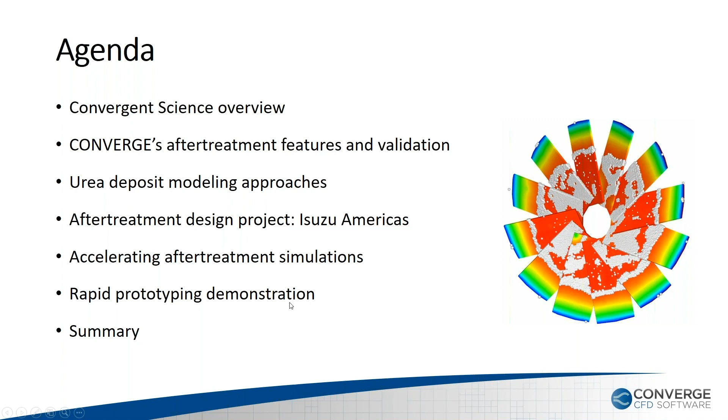Let me go ahead and describe Convergent Science for you. We started in 1997. You can see a picture of our headquarters up there in Madison, where Dan is right now. I'm down in the Texas office.

We have offices as well in Detroit, in Europe, and in India, in Pune. Since 1997, Convergent Science did a lot of consulting work and ended up developing the code that became CONVERGE. In 2008, we were able to sell that commercially. Since then, we've been extremely successful at selling that in in-cylinder combustion, and I'll have a slide on that next. I joined CONVERGE about 5 years ago to help them go into gas turbines, and then rapidly also took on helping go into after-treatment in 2014.

So it's not the first time we've been doing after-treatment, but we've certainly learned a lot and feel we've become very competitive. We also do pumps and compressors and things like that. So there's a lot of other things that CONVERGE does if you're more familiar with us from in-cylinder combustion. We have a lot of partners that we work with routinely, and we look forward to partnering with you if you don't see your logo down here.

CONVERGE primarily originally started off as good for reacting flow inside of the cylinder for combustion, but we've also moved into doing after-treatment simulations as well. As you can see here, the adoption cycle of CONVERGE for in-cylinder simulation is pretty significant. There's a substantial, very good chance that whatever car or truck you're driving, the manufacturer uses CONVERGE to design what happens inside the cylinder.

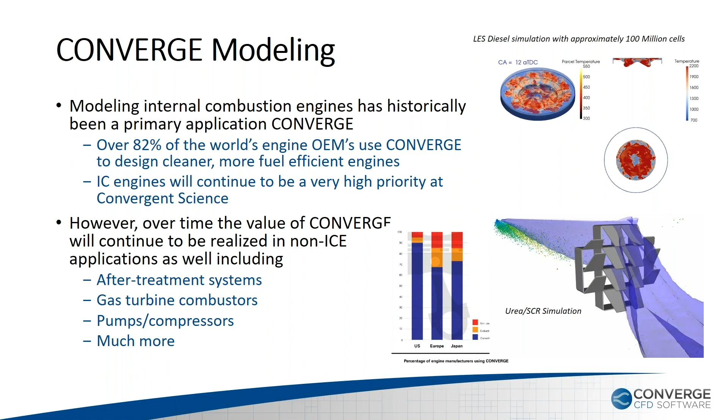Let me talk now specifically about urea deposits and some of the design challenges that after-treatment system, or ATS, designers face. Of course, they're all trying to meet emissions regulations in a cost-effective manner. Every time I talk to them, they're telling me they have less budget, less people, and less time to get done the things that they used to do in the past in their design projects. So they're looking for fast and accurate, or fast and effective, design processes that can help them meet their timelines.

The other key driver is the move towards more compact urea SCR, or after-treatment system, designs. Gone are the days of the long inline systems, and now we're looking for systems that fit underneath the hood, and they're also lower temperature to try to improve efficiency. And that poses some specific challenges when we look at urea deposit formation.

Certainly you're going to rely on effective splashing and filming of the urea-water solution, and those films can be in the temperature range that we know forms deposits, like you can see here around this injector. So urea deposits are consistently the number one thing that manufacturers tell us when we talk to them about their challenges. They don't have a solution for this. They have ways of assessing it, and I'll talk about that in just a second, but they're really very much seeking a solution in this area.

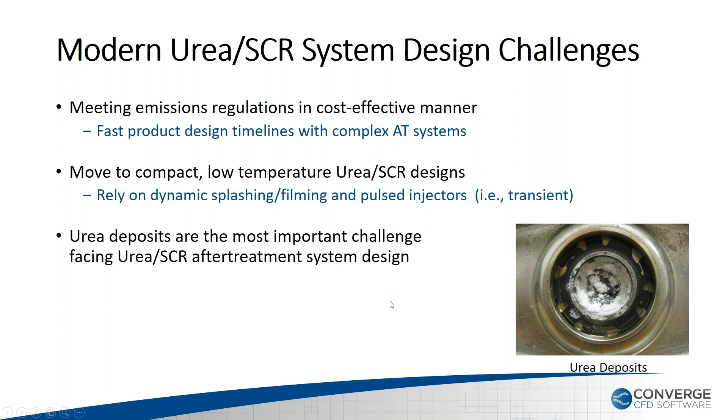Just a quick overview of CONVERGE for those of you who may not know about us. We are an autonomous meshing code, so you'll never make a mesh again.

Once you set up a CONVERGE model simulation, it's very simple to change the controls where you choose the base mesh size that you want to use. You choose whatever embedding you might want to use around a wall or near a spray. And then you select Adaptive Mesh Refinement, AMR, which is a key way to add mesh automatically when and where it's needed in areas of high gradients of, let's say, velocity, for example, with after-treatment systems. So once you've set up your case, you can change that mesh literally as fast as you can change your shoes.

One of the key factors with CONVERGE, or value propositions, is complex geometries and not ever having to make a mesh again. That all comes with advanced spray models. You can go anywhere from modeling just shooting droplets of size and size distribution with secondary breakup, to actually modeling primary and secondary breakup. We have a lot of studies on that.

When we talk about urea decomposition, we have two general approaches, and I'll describe them as simple decomposition. That's either using molten solid or multiple component approaches, where urea goes in one step, decomposes to isocyanic acid and ammonia, and then the isocyanic acid in another step decomposes to ammonia. So really it's just a single step for the initial urea decomposition.

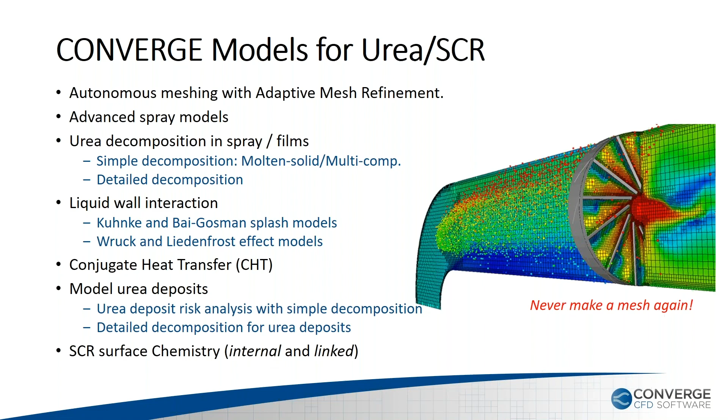Talk very quickly about spray wall interaction models, because this is a key capability that you have and you have to validate it. When the droplet hits a wall, there are different regimes it can go through, whether it's rebound, thermal breakup, deposition, or splashing. And the Kuhnke model that I'm showing here shows an effect of the wall temperature on that droplet and how it affects the actual formation of a film.

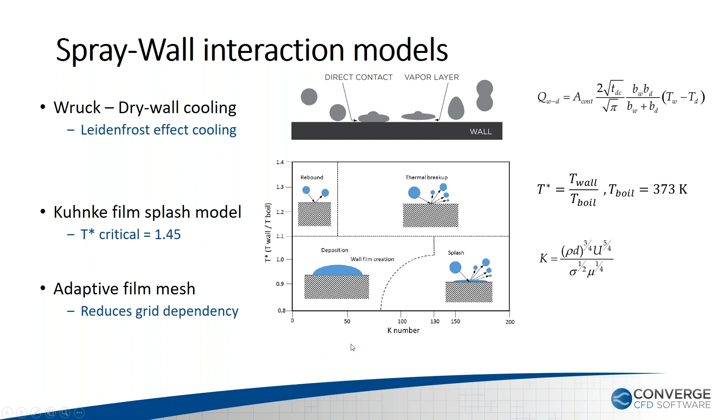And those that do this kind of work know that there is a T-star, or critical temperature, at which this transition occurs. And of course, we have that capability as well. And then, in some situations, you may find that an adaptive film mesh will help reduce grid dependency, and so we do have that capability as well.

So let's talk about validation cases. The nice thing about after-treatment systems is that they have some very well-accepted published validation cases.

We're talking about single droplets here, where we're able to predict, comparing against the data of Wang et al., the initial reduction of the droplet size from water evaporating, which is faster than the urea decomposing, and matching those data at various temperatures.

And then when you look at urea sprays, not hitting a wall yet, but just sprays and its conversion efficiency from urea to ammonia at different temperatures, we're able to predict the data of Kim, which is another very classic experiment. So we're able to predict those very well.

On spray wall interactions, there's the famous Birkhold spray wall model, and we're using that as one of the key validation models in the work that we'll present today. That's where you have hot air flowing on the top and the bottom of a plate, a 2 millimeter thick plate, that then has pulsed urea water spray on it.

You have to identify what the temperatures are in the plate as it cools before the film forms, and then as the film forms. So that's a key validation experiment.

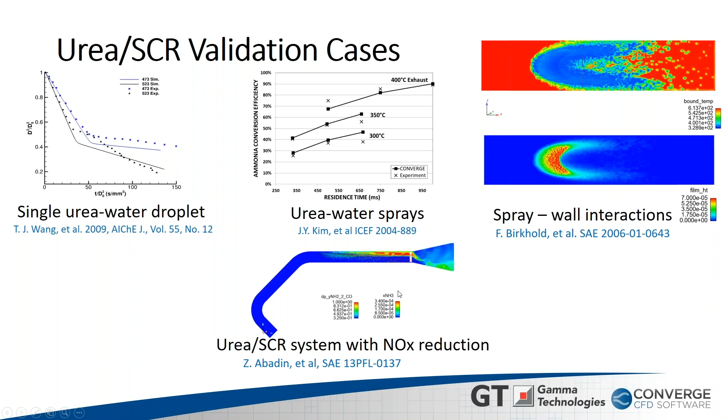This experiment talks about getting into the SCR, where we've taken some data from our friends at Southwest Research. Zainal Abidin did a study, and we were able to match the emissions reduction using GT Suite in that case, but also with our own internal surface chemistry. So this slide is intended to show you that we've done our homework on all the key validation cases for urea SCR performance. We've obtained good results on those, so we feel comfortable about our process.

If you look at the different approaches people use in after-treatment system modeling, 0D, 1D models like GT Suite and Axi Suite and the like, they just don't incorporate the 3D spray and flow, so they're sort of not effective in that area. Effective CFD certainly has the ability to aid design and troubleshooting. Hopefully you do fewer tests, but what ends up happening is the first test you do is a better quality design, and at the end of the process you have a much better quality design, or you can troubleshoot issues in the field. The key thing we all know for CFD to be valuable is it has to be predictive, and it has to be fast enough to meet the design pace. You can't come back with your simulation result in 3 weeks when the design team has already moved on.

So crystalline deposits, we know that they form in a narrow temperature range. If you use simple decomposition and identify which of these films are in the right temperature range to form deposits, and then look at some other key transport factors that might affect deposit formation, you can develop a semi-empirical relationship to predict that deposit risk. The problem is that while you've identified where it's risky, you don't know if it actually happened or not. So you really have no information on crystalline species to either inform your design or look at regeneration strategies.

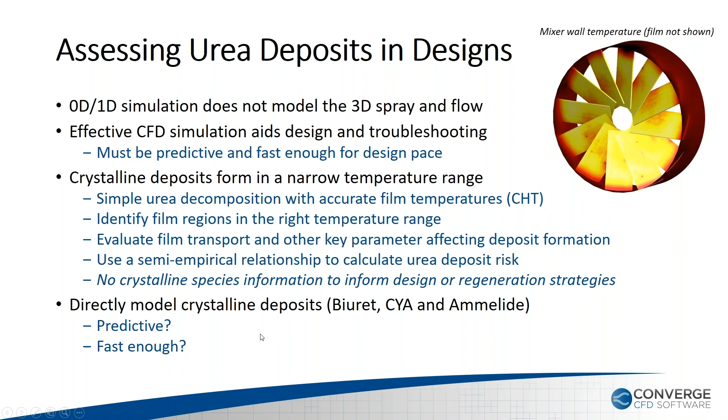So what we'll talk about here today is directly modeling those crystalline deposits, and those are biuret and also cyanuric acid and ammelide, that Dan will talk about. So the question you should ask yourself is: is it predictive, and is it fast enough?

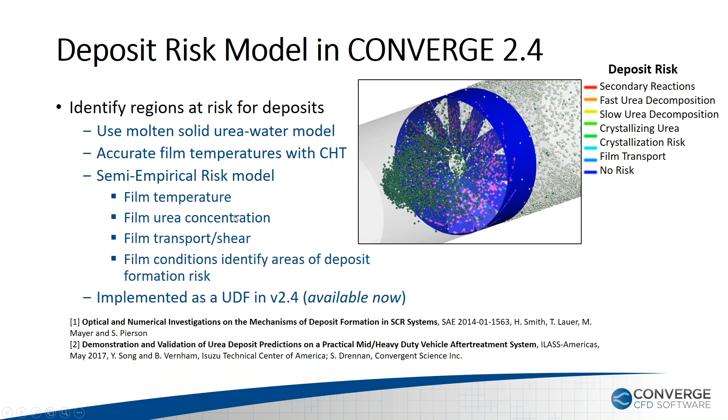Here are some results from our deposit modeling in our current version, identifying of the films on the surface which of those have certain risks. I'll talk about in the next slide this actually being applied to a commercial design case.

This is a study we did with an early adopter of our urea deposit capability. Yong Sun took the lead on writing this paper for Isuzu Americas, and we were happy to have them as an early adopter and alpha tester, and also to share the data they had and its performance with CONVERGE. It's a medium duty diesel truck, and an after-treatment system study aimed at maximizing the overall NOx reduction you can get out of this system.

So the urea is injected here, and there's a decomposition tube we're looking at here. We know that if you put too much urea in at certain conditions, or DEF, you'll begin to form deposits. Their goal was to try to increase that DEF dosing limit so they could maximize the NOx reduction.

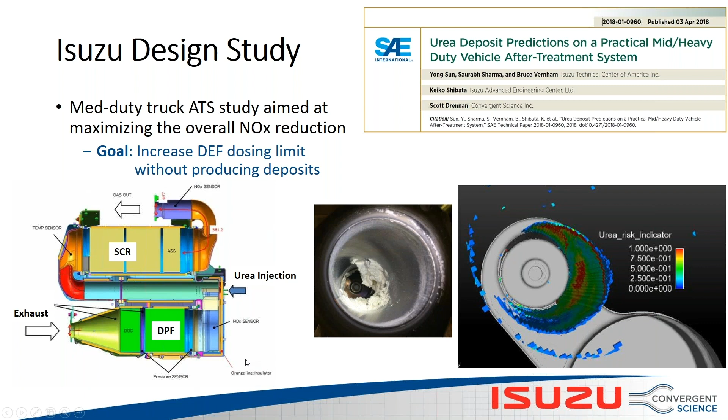If you look at this paper that was presented in April at this year's SAE, that Yong presented, you can see there are deposits that do form here, these little white deposits. And sure enough, when we ran CONVERGE and looked at the film temperatures and did a risk analysis, the CFD prediction shows exactly where the highest risk occurs, and that matches or correlates well with the actual deposit formation.

That's great information to have, but it doesn't tell you what's in those deposits. One great benefit we had was that Isuzu Japan did the experiment and analyzed those deposits. You can see their chemical analysis up here, and the key thing to point out is the ratio of ammelide to cyanuric acid — two of the crystalline species that decompose at very high temperatures and are hard to get rid of.

You can see from our simulation that we were getting about the right ratio, even though we were running a very short amount of time. That made us feel that we had the right ability to predict where the films occur, and that the chemistry in the mechanism was working well too.

So what this leads us to is that the approach is working. We just really need to speed this up, and that gets to a lot of the good work that Dan's done this year. So I'll pass the ball over to Dan now.

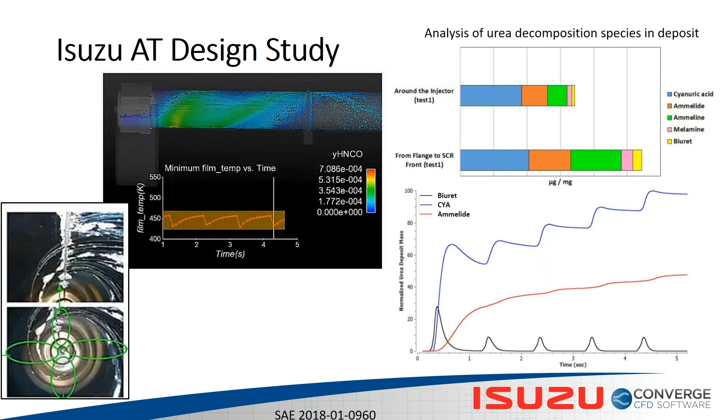As Scott has shown some of the results with our detailed decomposition model, the work with the Isuzu has shown the accuracy of that model, not just for academic lab studies, but on a real after-treatment system with pipe ends and cooling to the outside, convection, and complex geometries. Now that we have that validation, both fundamental and applied, the next thing we need to do is speed up our simulations so we can bring those accurate predictions to timescales that are more informative for system designers.

As well known in the industry, the solid deposit problem is really the main problem facing the industry now in the application of the Urea-Water solution-based selective catalytic reduction. Some problems that come along with that are reduced NOx reduction, because deposits such as we see from Isuzu's system tie up a lot of ammonia that is intended to pass through the SCR.

We can have injector blockage. Once the injector is blocked with deposit, that interferes with the spray. Whereas a DEF injector is designed to produce a given spray with a known size distribution, Sauter mean diameter, and velocity, when a deposit gets in the way, it totally messes up that spray, and that injector is not behaving as expected.

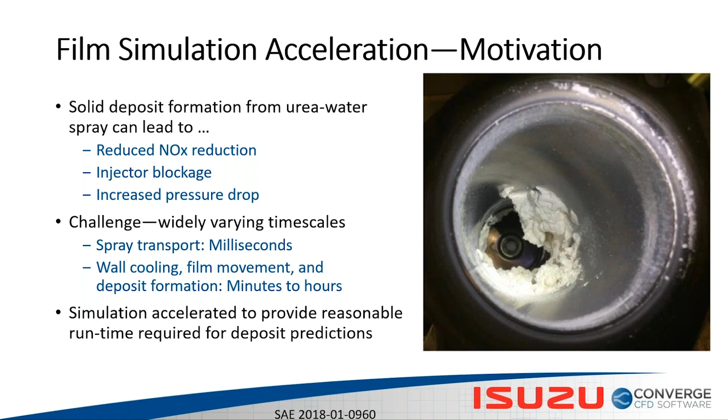And finally, the deposit formation, or the deposit chemistry, typically takes hours. So we know that film takes minutes to reach its equilibrium positions on the surfaces, and for the actual growth, via addition of new urea through urea-water solution dosing, and through that chemistry to take place, we need hours. So we're moving towards these longer timescales with an approach that allows us to capture the key physics accurately, which in this case is what's happening with the spray, the film, and the wall temperature. We find out that we can make some approximations with the gas field that allow us to have greatly accelerated runtimes.

So now we'll step back into the chemistry a little bit here. We'll talk about this detailed decomposition mechanism that Scott alluded to. As we know, the purpose of injecting urea-water solution is to produce ammonia.

In the desired pathway, 1 mole of urea, once the water evaporates, will yield 2 moles of ammonia. However, what was identified quite early on, Nishioka et al. in 2006, is that we see the formation of biuret.

Biuret is formed when isocyanic acid from urea decomposition combines with some of the non-decomposed urea. We note on the right that biuret is starting to get to a heavier molecular weight, with 2 carbons as opposed to 1 for urea.

Similarly, once biuret forms, more and more isocyanic acid combines with biuret to form, consequently, cyanuric acid, ammelide, ammeline, and some melamine. These compounds are very problematic because they form at a certain temperature range, and then take a much higher temperature in order to be decomposed. So it's really the high temperature stability of these ring compounds that makes the deposit problem what it is.

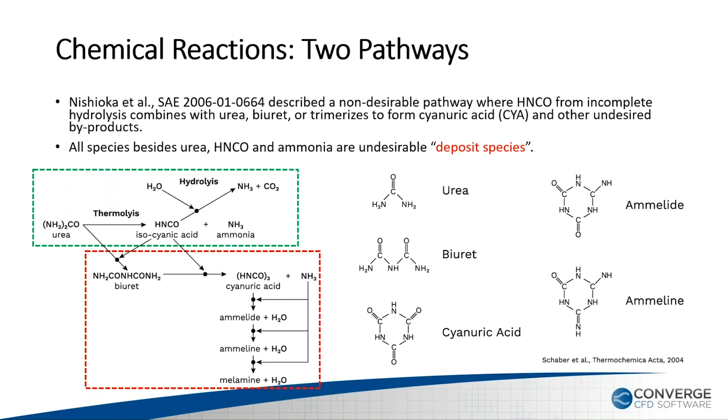Now we can look at some of the formation and decomposition rates of these specific chemical compounds. There was some excellent laboratory work done by Schaber et al., and this work was replotted here by some more recent authors. What we see here is different colored curves for different components.

What we see here, first of all, happening around 175 Celsius, is that urea is decomposing. So what that means is a sample of pure urea was heated up, and we see it starts decomposing at a high rate of 175 to 200 Celsius.

But then if we look below the axis, we see that the first compound being produced is biuret - that red curve. So biuret is first produced from urea decomposition, but then it follows urea at a slightly higher temperature, and we see that the biuret is decomposing.

So the very next key step is that once biuret starts decomposing, then we see formation of cyanuric acid, ammelide, melamine. These very high molecular weight compounds are being produced anywhere from 200 to 250 Celsius. So the real difficulty lies in that they are not decomposed until higher temperatures above 275 Celsius.

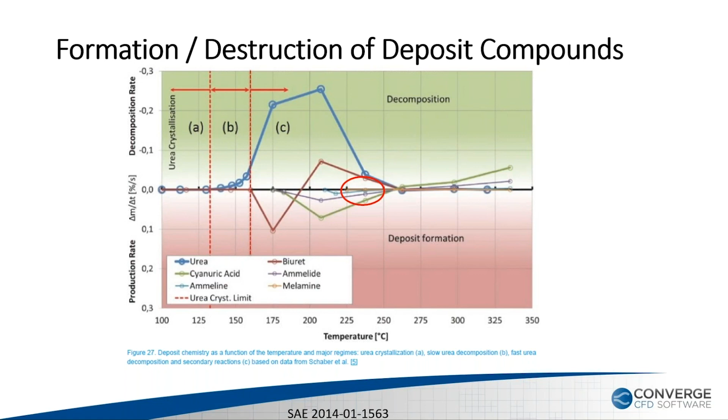So we have this cascade from urea to larger and larger molecular weight compounds. A better understanding of that mechanism will allow us to avoid the production of these in real systems.

And that has been validated with the work of Lundstrom for gas release and with thermogravimetric analysis of Schaber et al. 2004.

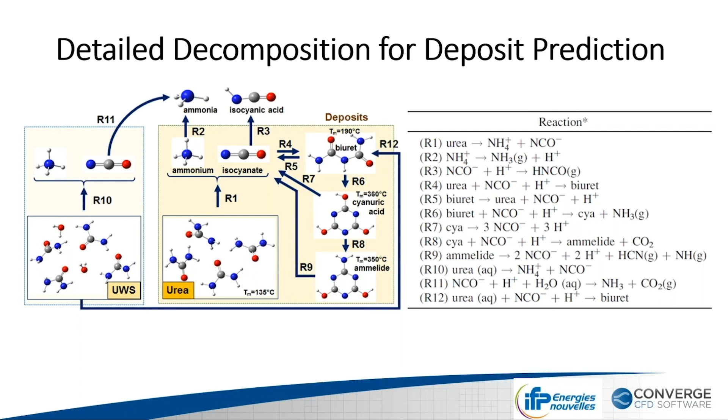So now, after reviewing the chemistry, we'll jump back into a technique that we call frozen flow. It's this technique that's giving us a very good speedup compared to our traditional approaches.

One thing we notice right away is if we compare the momentum flux added to the domain from an injection - we know the liquid density, the nozzle area, and the spray velocity, which is squared - comparing a diesel injection using typical numbers, we get 16 kg meter per second squared. But then if we look at a typical urea-water spray injection, which has a much lower nozzle size and a much lower velocity, we see 0.003 kg meter per second squared.

So what we see is that this momentum, which interacts with the gas phase and causes eddies and recirculation, is less than 0.02% in the urea case compared to the diesel case. So we see a huge disparity, and we think, well, maybe we can take advantage of that. So we find that we can.

The major thing we take advantage of is that with steady inlet conditions, which we typically have for exhaust flows, we have a known mass flow rate at a known temperature. The only forcing function on that flow to cause it to change is the spray. So when the spray turns on or off, we might see a small change in the flow field, but otherwise the flow field does not change much.

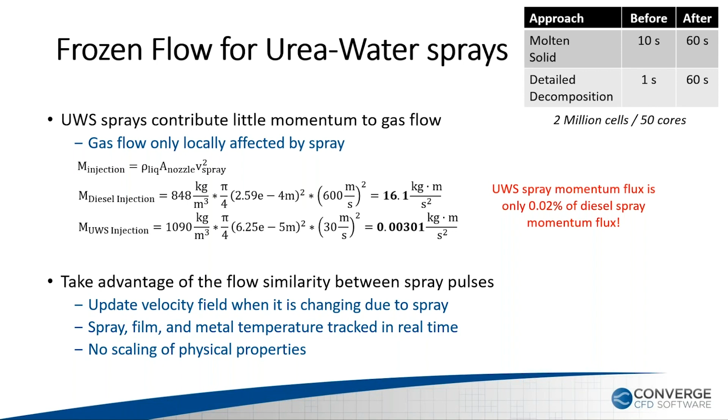So of course, when we have a new approach, we need to validate it to ensure that this approach really does capture the key physics.

So the experiment of Birkhold et al., very fine experimental work, was done where a plate in a rectangular channel with gas flow had basically Urea-Water spray onto it.

So Birkhold, you can see his experimental results on the left with X's. He varied the initial temperature and the ammonia and Urea-Water dosing rate.

So you can see at a higher temperature, there's a slight amount of temperature decrease when the duty cycle is increased. When it's doubled, we see that we have a lower final temperature.

And finally, he looks at another condition with an initial temperature about 340 Celsius and a 20% duty cycle dosing.

So the key thing to note in all these conditions is that we never see any film formation here. There's wall cooling due to the spray wall interaction and that Leidenfrost effect, which we capture through the Wruck model, an analytical model that captures that dry wall cooling effect.

So our simulation approach, you can see our results on the right in the solid curves. Now, at a first glance, you would say we have quite similar results to what we have on the left - those solid lines on the left are Birkhold's own simulation. But the approach is quite fundamentally different.

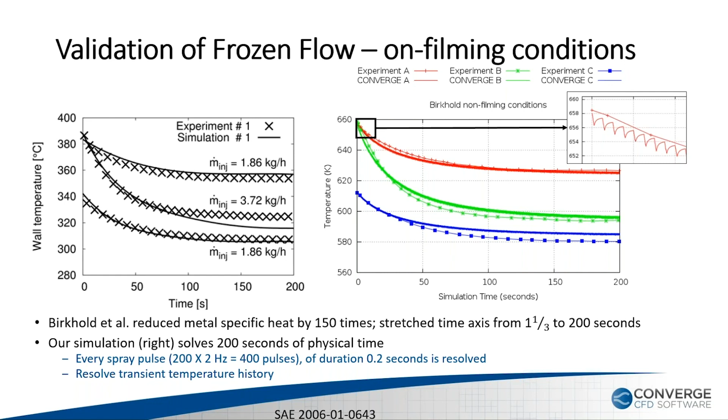So instead of injecting the correct liquid mass divided by 150, we have the actual correct injected liquid mass in our simulations. Not shown here is that the liquid mass, for the filming case, which brings us

to - those prior cases do not form a film. For the condition in which a film does form, we see that the liquid film increases until it reaches a

steady state, which means we have run through enough physical time for a balance between new liquid addition and evaporation and decomposition to have been reached.

One important thing to note also is that, from the last slide, the coolest condition did not form a film due to the low dosing rate.

Experimentally, Birkhold simply doubled that injection rate and formed filming. So that's what we did in simulation as well in Converge - we doubled that injection rate.

We didn't tune any numerical parameters additionally, and then we saw that we were able to see the film formation here. So the video on the right shows

just a close-up in time on one of the injection pulses. This is near the end of the simulation, around 100 seconds, where we have nearly reached a steady temperature

distribution in the plate. So if we look at the plate, we see that we resolve that cool area very

nicely, and it's smooth because we have the real specific heat, real properties. So this spray we see here is simply one of hundreds of injection pulses.

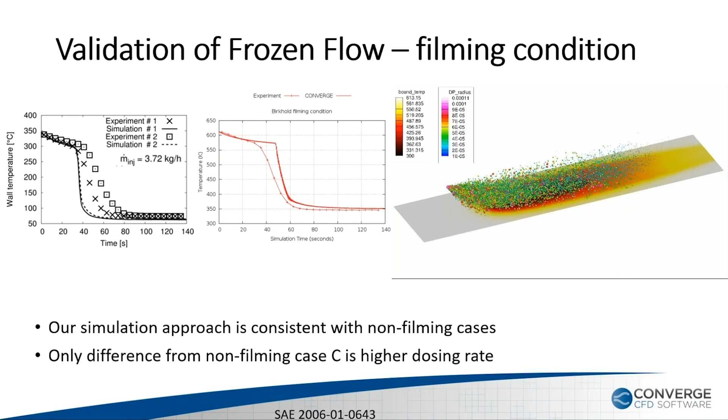So finally, we want to highlight another key advantage of Converge, which is our ability to do rapid prototyping, or quickly change out a geometry.

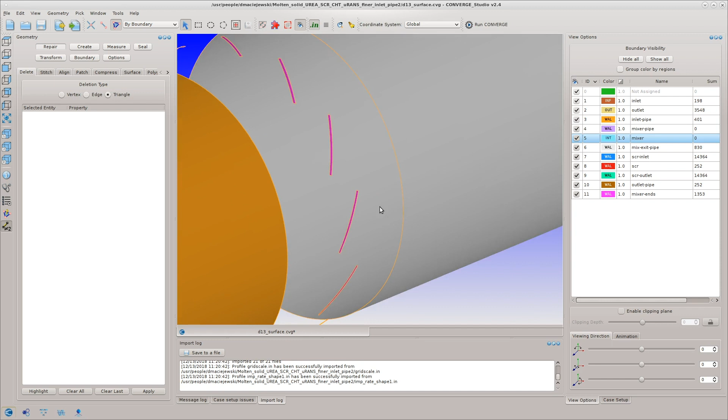This is a typical diesel exhaust aftertreatment system. We will demonstrate how to replace the splash mixer with a completely new design and prepare the surface for a new simulation with Converge. The first step is to delete the triangles associated with the boundaries we wish to replace. We select the mixer pipe, the mixer, and the mixer ends. Note that we delete the triangles but not the boundary definition.

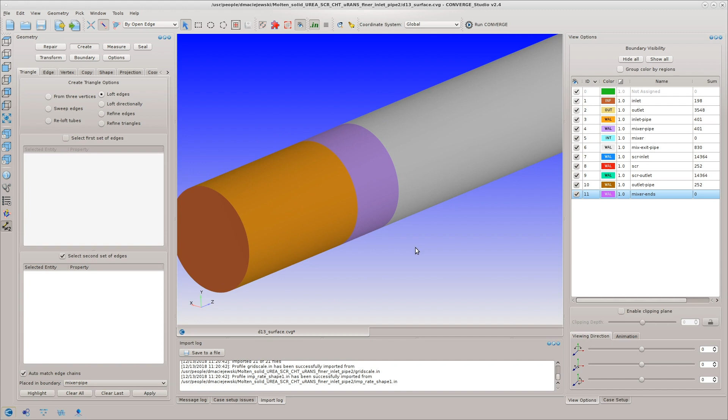Next, we replace the mixer pipe. We go to Create Triangle, and we loft edges between the two sets of open edges, which are highlighted in yellow. Now we click Apply after assigning the boundaries of the new triangles to mixer pipe. Now mixer pipe has been recreated, and we're ready to import our mixer.

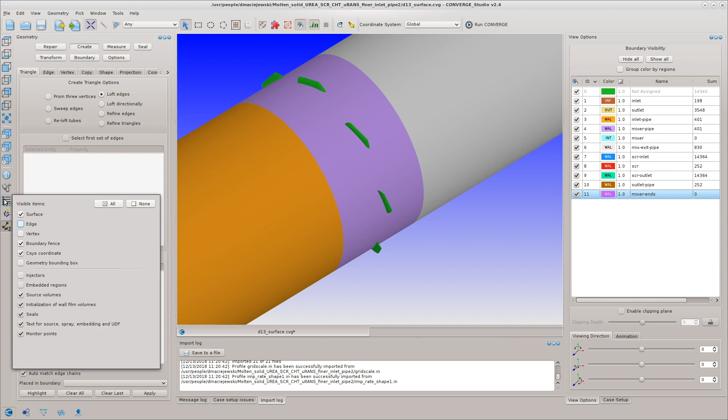We go to Import. We import the STL file created from your CAD package. We import it into our case setup, and we've placed it so it's in the correct location in our geometry. So now notice that the mixer extends beyond the pipe walls. We've seen the green tips extend outside of the domain.

We hide all the boundaries and just show the non-assigned triangles in dark green, and we see the shape of the new mixer which we want to use.

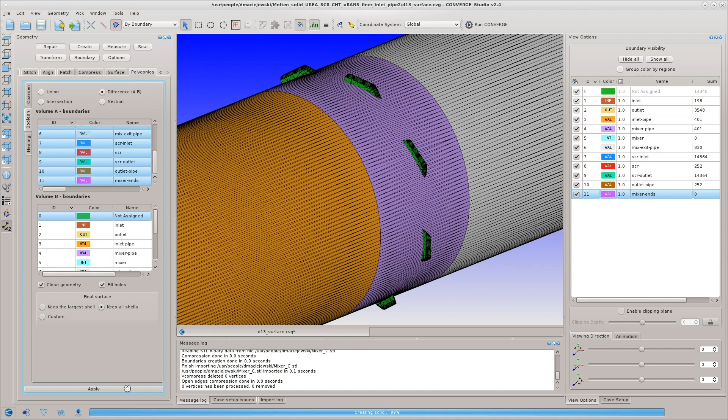We go to Repair Polygonica to use a third-party Polygonica tool available with Converge Studio. We first select the boundaries of our existing geometry, and then we select the not-assigned boundaries of the new mixer, since they will be subtracted from the existing model. Polygonica has finished the Boolean operation, and now we can see that the mixer no longer protrudes from the pipe.

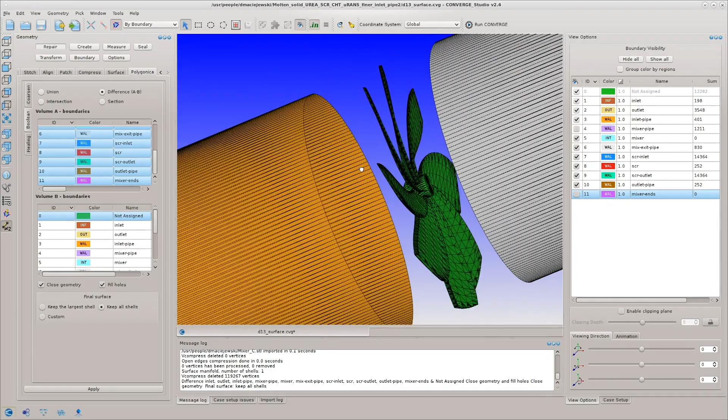Again, we hide selected boundaries so that we can see the mixer is still inside the pipe, and any surfaces which do not intersect the outer wall are unchanged. Next, we assign the triangles by boundary. We select the non-assigned triangles and assign them to mixer, which contains the boundary condition information for the mixer.

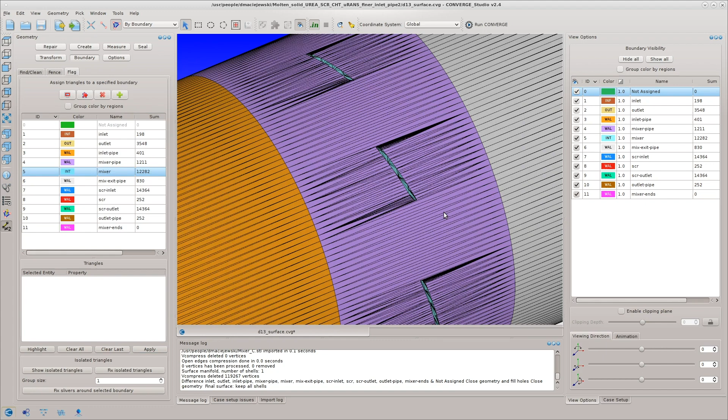Next, since this is a conjugate heat transfer simulation, when we simulate the metal temperature inside the mixer, we need to cap the mixer. So we create 8 new surfaces. We do that by patching. We select a list of edges and use a box select. By going from left to right, we only select those edges which are entirely within the box. So you can see that we can quickly patch these holes with the patch tool.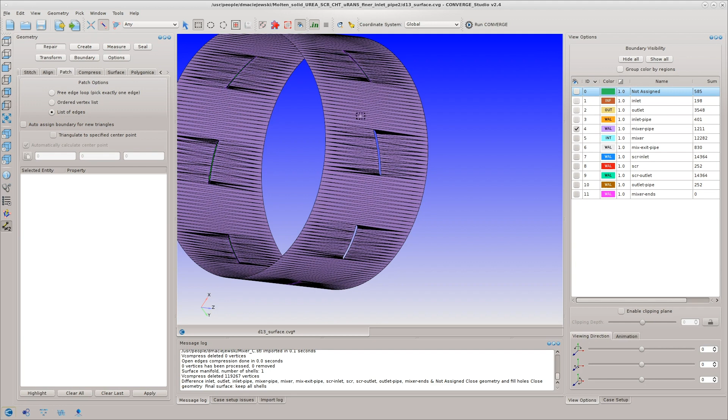Now that we have finished creating all of the triangles necessary to close off the domain properly, we go to Boundary, Flag, select by Boundary. We select any one of the new triangles since they're all in the Not Assigned boundary, and we simply click Apply to assign them to the mixer ends boundary.

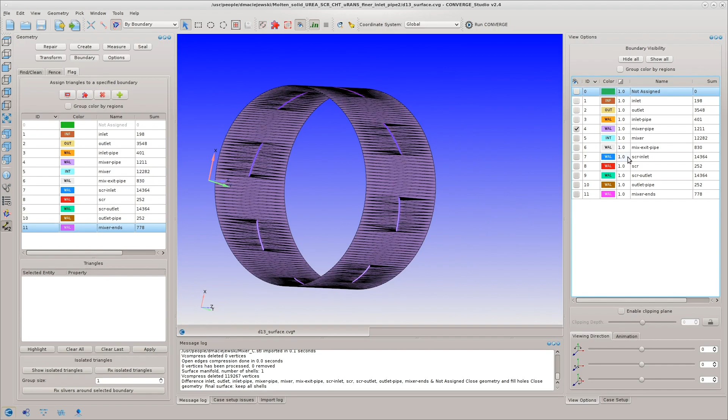This means all of the new triangles for mixer ends and the mixer respectively receive the same boundary conditions that the old geometry received. This ensures complete consistency in boundary conditions from the prior analysis to the new analysis we will run.

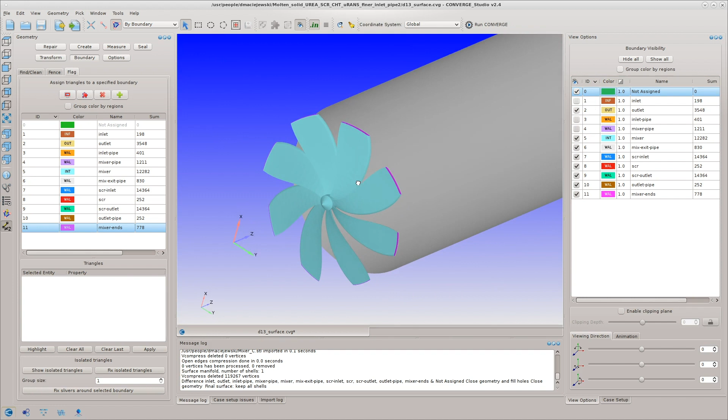Now we just show the geometry that will be run in the new Converge simulation. So now our geometry, our case setup is complete for our next simulation with Converge. We simply export the input files and we can run our new Converge simulation, and you're ready to test your new geometry.

Great, Dan. Thank you. There's a good chance that in most design review meetings where CFD results are presented, one of the primary next steps is to make some change in the geometry. Well, here's where you can make a change in the geometry and have cases running before anybody has a chance to type up the meeting minutes. It's really just that simple, because all you need to do is drop in that new geometry like Dan showed.

So let me finish up with a couple additional slides. Just a quick summary here on some of the work that we've done and shown you here today.

Certainly detailed decomposition gives you that ability to predict urea deposits. We've seen it validated in some of the work that Dan's done. And one of the key things we've done is accelerate the simulation time, so now you're able to get minutes of simulation time. 5 to 10 minutes is now quite feasible. Of course, you may say, hey, my experiment is on the order of an hour.

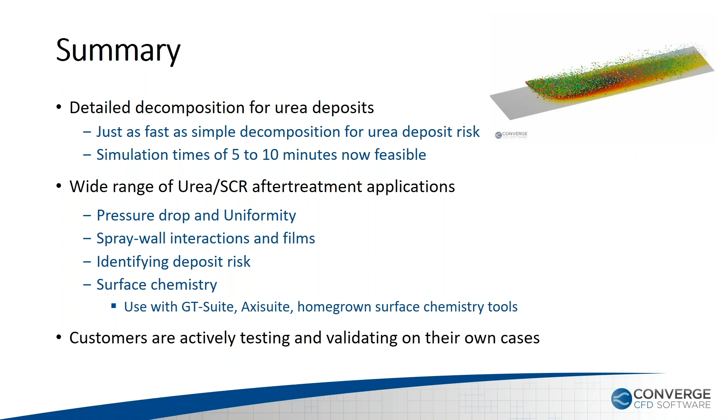CONVERGE does offer a wide range of urea SCR after-treatment applications, all the way from simple pressure drop and uniformity simulations to incorporating spray wall interactions and films, identifying deposit risk, and looking at surface chemistry as well. Just like Isuzu Americas has done, we encourage you to take a look at it at CONVERGE. Customers are actively testing it. I can't tell you all the customers, but you can imagine some of the major manufacturers in the world are looking at CONVERGE right now, and validating on their own cases.

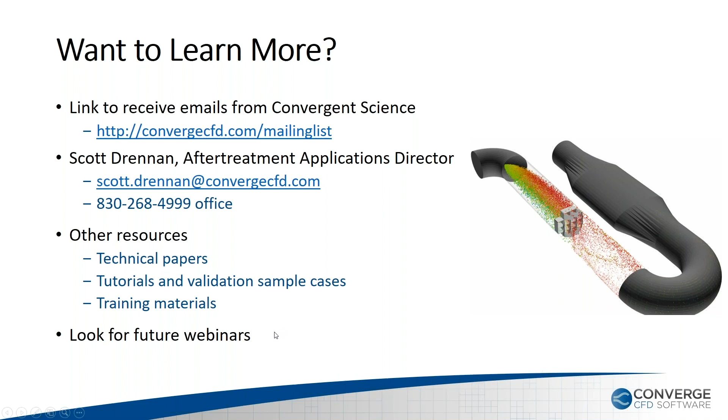There are a number of technical papers, including the work that Dan talked about today, and some additional validation work on the detailed decomposition mechanism submitted for next year's SAE. We also have papers from Isuzu and other validations we've done that are available to you. We've got tutorials, detailed decomposition tutorials and validation cases you can run yourself, and a wide range of training materials. Please look for future webinars we have, not only on after-treatment, but also on other applications.

Before I go to the thank you slide, we had a couple extra minutes here before the top of the hour. I've been looking at some of the really good questions that have been asked, and there are a few common questions or common topics, so I wanted to take those here.

One question, or a number of questions, have asked about validations of urea deposit predictions on commercial systems, where we showed mostly work on some fundamental validation cases today. We have been doing that work, and we're able to show you the work that Isuzu Americas published. Unfortunately, we're not able to share the commercial work we've done with other companies under NDA. So we encourage you, if you know of some publicly available validation cases that look like an actual urea SCR system, let us know. And if you're able to share one of your cases with us under NDA, we'd be happy to look at that as well.

Another series of questions were about the reaction rates - can you see those for the detailed decomposition mechanism inside of CONVERGE? The answer is yes, you can see them. One follow-on question is, if you have data, can you tune that mechanism to your data? The answer is yes, you can, for both the detailed decomposition mechanism and some of the semi-empirical parameters in the urea risk analysis as well.